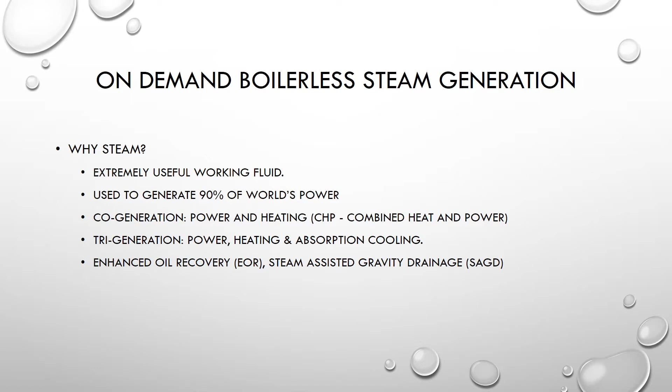Cavitation, the process of vaporization, bubble generation, and bubble implosion in a flowing liquid, is used as the underlying process within the cavitation engine. Modern diesel injectors are designed to enhance cavitation in the fuel being injected into combustion chambers. In the case of the cavitation engine, water is used instead of diesel fuel, and the injected water is filled with millions of cavitation bubbles.

This injected water volume collides with the impact chamber wall at a very high velocity, in excess of 1,000 meters a second. Instantaneous pressures occur which crush the cavitation bubbles within the water droplets. Cavitation bubbles have the ability to focus intense energy and forces during their collapse. The resulting heat energy contributes to the continuous creation of superheated steam within the impact and expansion chambers.

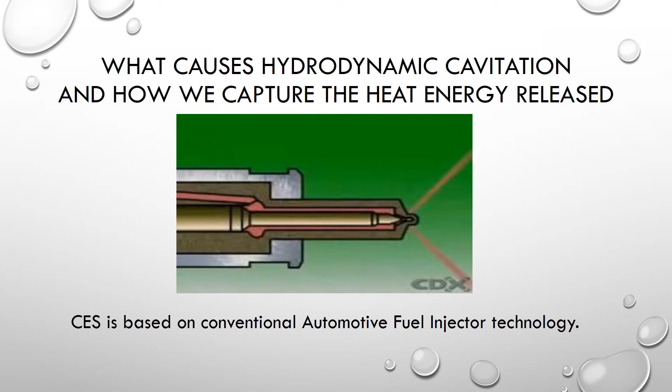As they expand, they disperse the fuel, and hence it burns better. In our case, we're impacting these cavitation bubbles on an impact chamber surface well before they expand beyond the point where they would normally be combusted. And this is essentially how the system works.

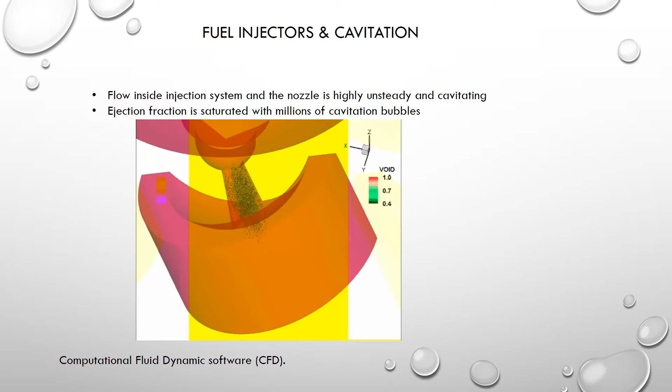In the classic Brennan text, the mathematics and derivation of this are gone into extensively, and if you're interested in this, you can go ahead and pursue that text. You can find that on the Cavitation Energy Systems website.

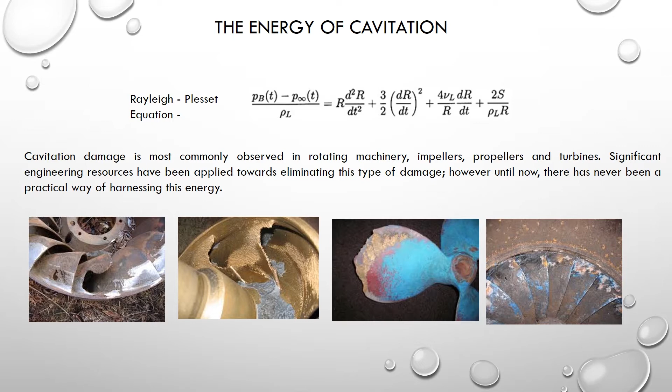Now, the thermal energy that's produced when these bubbles collapse is a function of the ratio of the radius of the uncollapsed bubble divided by the radius of the collapsed bubble, which in this case can be very small, raised to the cubic power. And this can be quite substantial.

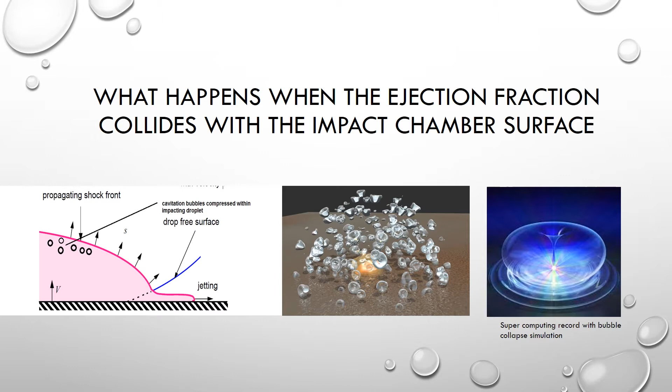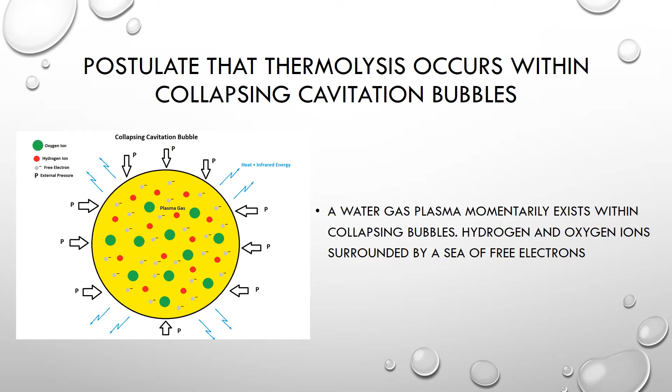Temperatures above 3,000 degrees Kelvin or centigrade cause in excess of 50% molecular separation of water within a short time frame. Above 5,000 degrees, you get greater than 90%. As the gas cools, molecular hydrogen and oxygen reform. Under pressure, this mixture explodes, yielding water vapor, steam, which is vented from the impact chamber at high velocity as it passes through the pressure relief valve. Conductive and radiative heat energy are also released and captured.

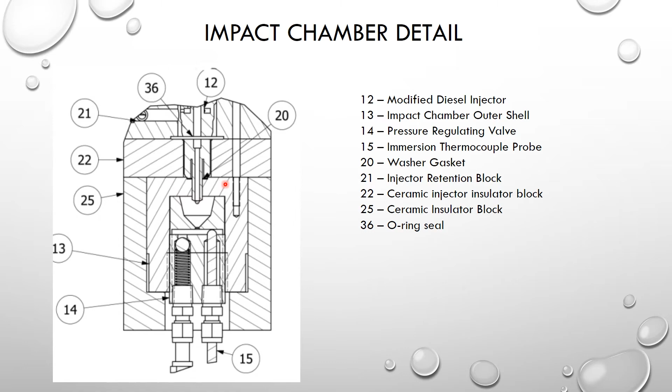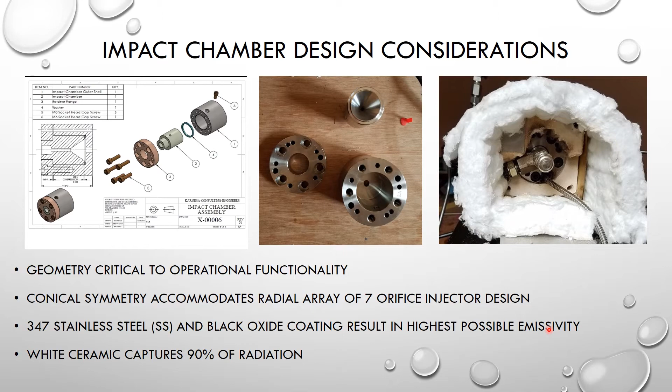What's important here is the system is using 347 stainless steel, which has a very high emissivity, as well as being coated with black oxide. These parts haven't been coated with black oxide yet, but the whole point is to retain as much of the radiative component of the heat transfer as possible. So we capture the conductive heat and the radiative heat, typically in terms of infrared, so that there's very little energy loss from the system.

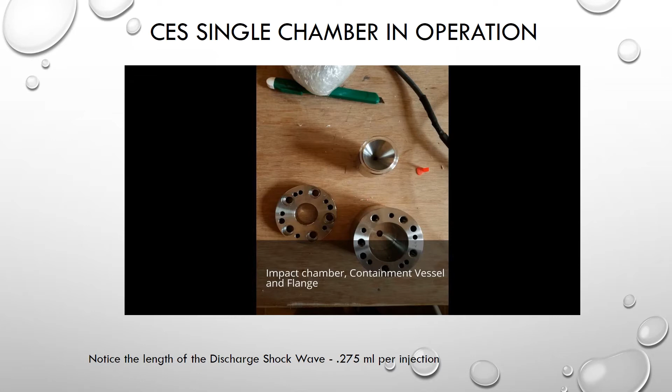What follows are the components of the impact chamber. The chamber itself is in the upper right-hand side of the image, along with the containment vessel below it. Next, we see the assembled impact chamber, followed by the impact chamber with the pressure regulating valve installed.

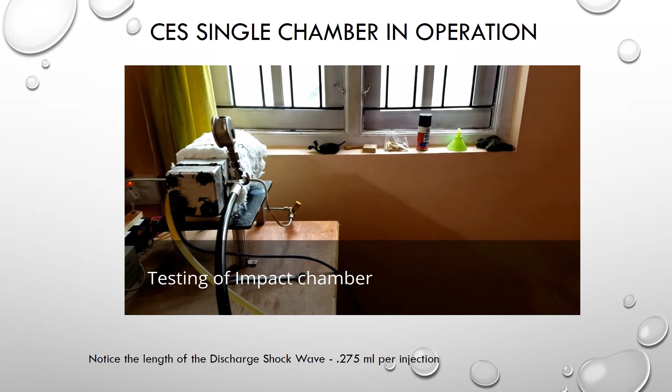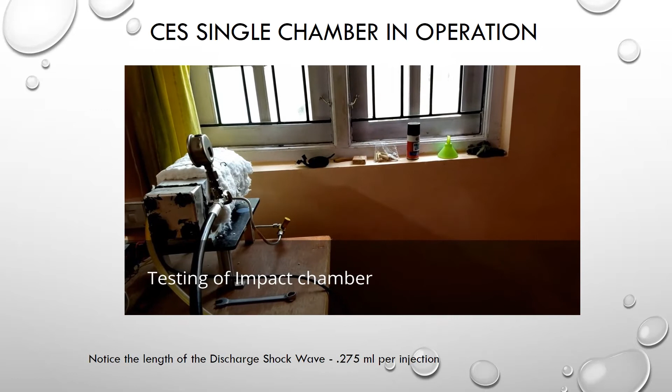The entire system surrounded by insulation is there, and now we see it actually operating at approximately 1 injection per second. Each of these injections corresponds to 0.275 milliliters of water. Notice the extent of the shock wave and the power of this, and how far it is from the impact chamber itself.

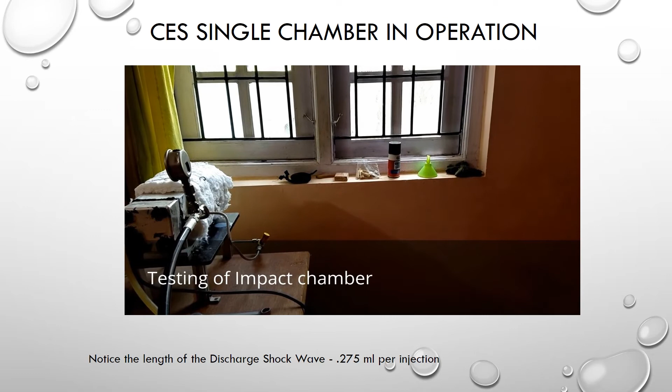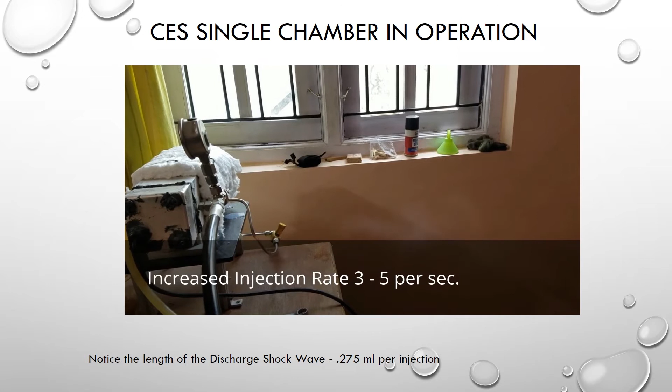We are increasing the pulse rate to 3 to 5 per second. In a practical system, this is where we would normally operate. This is one element. Typically, in a 500 pound per hour steam system, you'd have 32 of these units ganged together under central control by a computer.

Here you see it in slow motion. It's like a gun going off, you know. Mm-hmm. Reminds you of the shrimp.

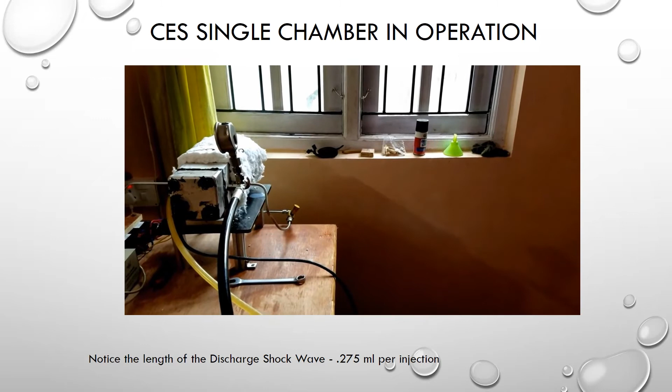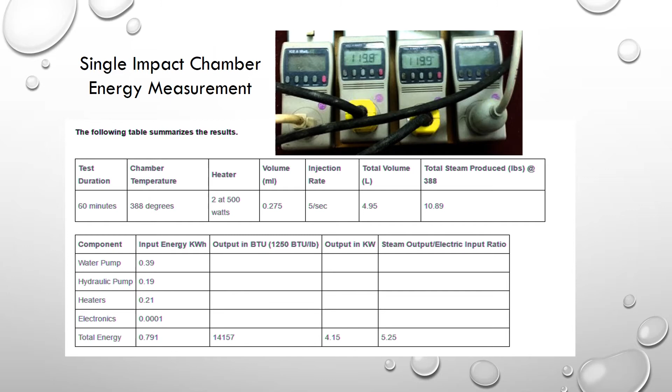During our developmental work on the impact chamber, we thought it would be interesting to test injecting a solution of salt, a 4% solution of salt. This is not coincidental, because the salinity of seawater is approximately 4%. When we did this, we were shocked with the results, and you'll see that in the video that's coming up. We obtained these very dramatic explosions.

So reflecting on this, we tried to conceive or postulate a mechanism for what exactly was happening. Within these collapsing cavitation bubbles, we have a gaseous plasma surrounded by a sea of electrons. Now imagine that collapsing bubble with these large sodium ions around the periphery. A sodium ion typically has a redox potential of 1, meaning it needs 1 extra electron to become a stable metal. So in our hypothesis, the sodium ion picks up an electron and becomes sodium metal.

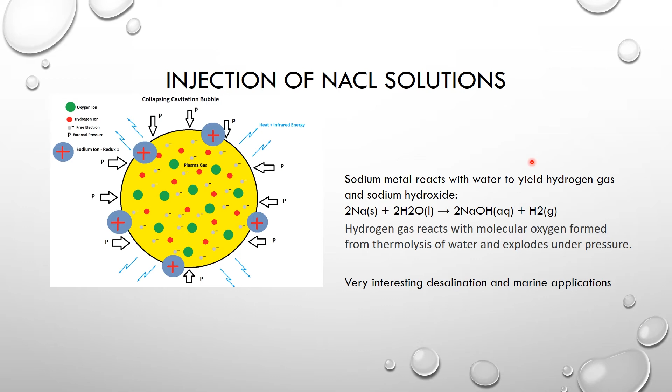The following video of the saltwater injections is recorded at 1/8 speed slow motion. The explosions were so powerful that they damaged the pressure relief valve, set to at least 600 psi, after 6 explosions.

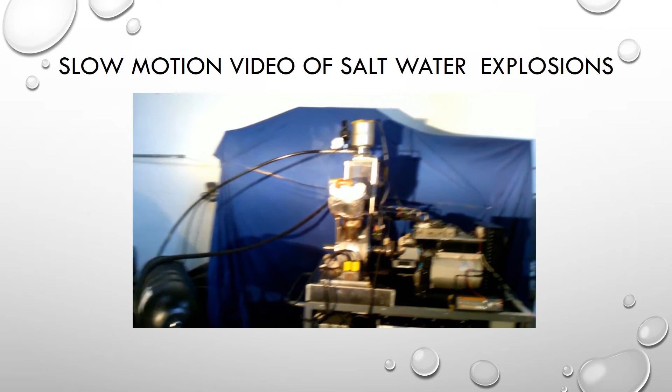This is a 4-impact chamber segment of what ultimately will be used as a 32-impact chamber, 500 pound per hour unit. What you're seeing here are piezo injectors. We'll be using hydraulic injectors for this.

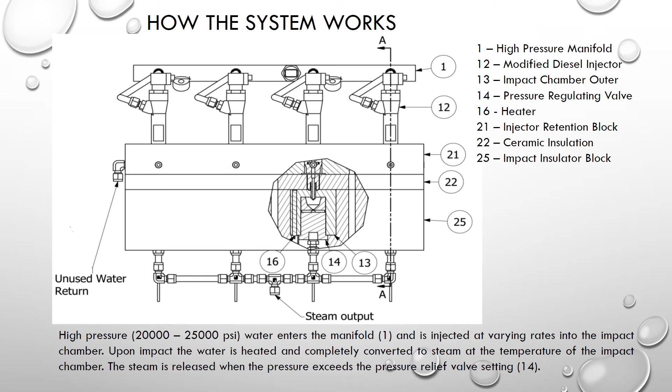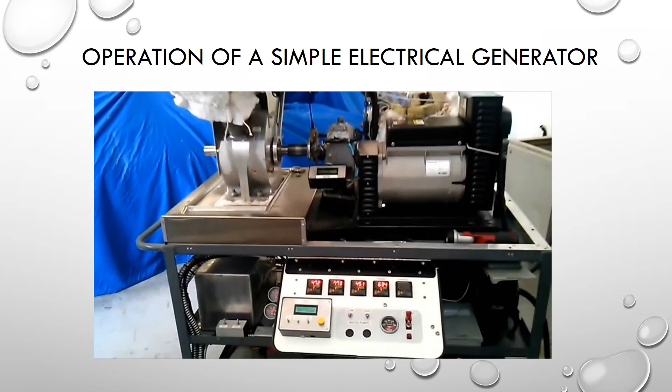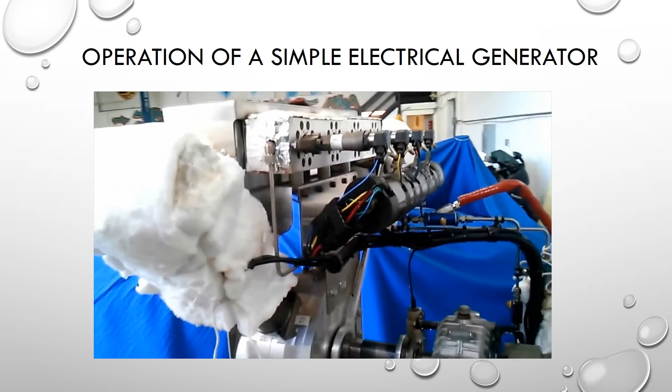What follows is an example of a 4-impact chamber unit driving a 20 horsepower V2 reciprocating steam engine, which in turn operates through a power takeoff and a 12 kW generator. This is an example of the small scale power generation that the CES is capable of doing.

During the following section, we're going to cover some of the more significant applications that CES is capable of. This would include enhanced oil recovery, power generation, textile manufacturing, desalination and water treatment, and marine propulsion.

Enhanced oil recovery is perhaps one of the most important areas of application for CES. The term enhanced oil recovery, EOR, refers to the technology used to extract crude oil that cannot be extracted through conventional technologies from oil reservoirs. It is also termed a tertiary recovery process, as it takes place after the primary and secondary oil recoveries.

Oil extracted via primary recovery accounts for 5 to 15% of the total reservoir, while secondary recovery can extract 20 to 60% of the total oil present. By installing enhanced oil recovery, 35 to 75% of oil can easily be extracted from an oil reservoir. To extract the proved reserves, oil extraction companies are pushing the use of enhanced oil recovery in existing oil wells.

Thermal enhanced oil recovery technology consumes hot water and steam to stimulate the extraction of crude oil from the reservoir. The commonly used steam injection enhanced oil recovery methods are cyclic steam stimulation (CSS), steam assisted gravity drainage (SAGD), and steam flooding.

Steam dominates the thermal technology market and is significant in North America, as most of the imported crude from Canada, 35% of all U.S. imported crude, is extracted using SAGD. Per barrel energy costs in producing this oil are heavily dependent on the cost of manufacturing steam.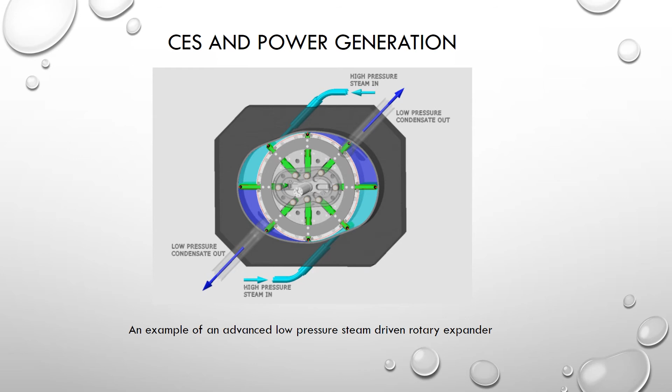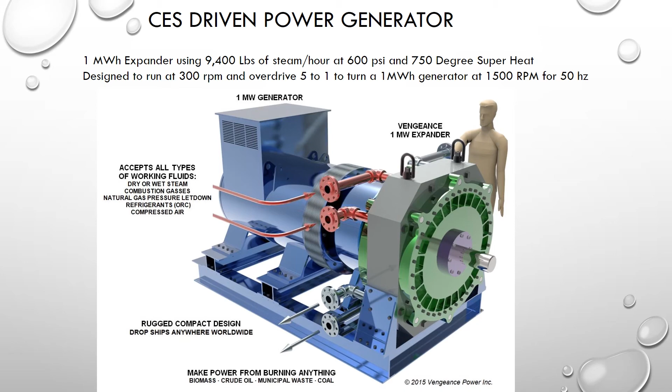This slide depicts a linear generator. Linear generators have become very popular of late because they're very efficient, upwards of 90%. We will design such a linear generator using our impact chambers arrayed on either end to operate it under computer control.

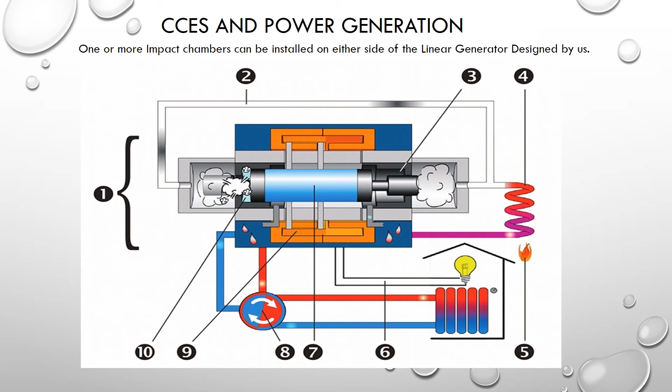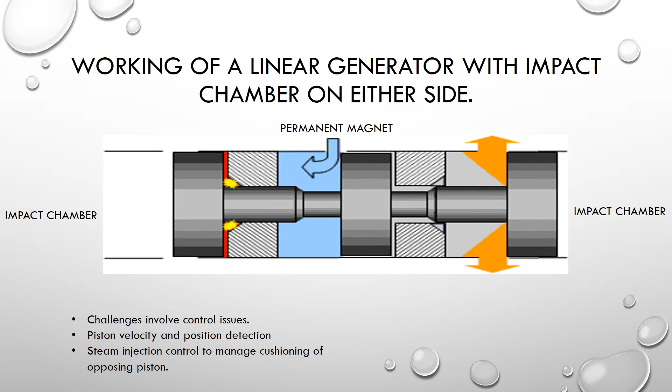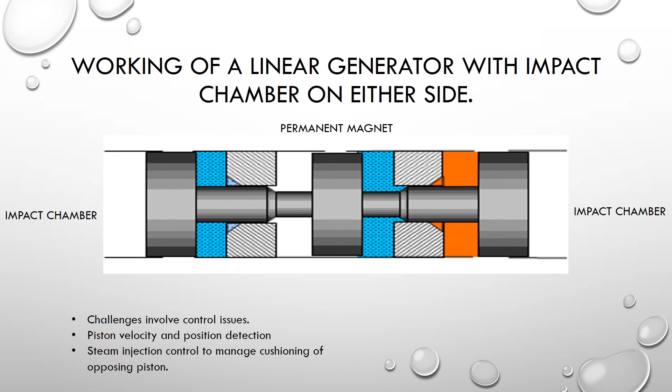Linear generators are a very exciting technology, and we anticipate building a working linear generator with our CES system. The problem with linear generators is, of course, being able to detect the position of the piston so you know when to input a cushioning injection to keep the piston from crashing into the opposite side. This has always been the problem with these: cushioning and position control. But we expect at some point in time we can overcome this and have a working, operational, economic linear generator.

Textile manufacturing is a major consumer of steam. It's used in all aspects of the process: spinning, weaving, drying, heating, and maintaining the temperature of textiles. In our experience, much of the major textile manufacturing occurs outside the United States and Europe, and is done in countries where labor is less expensive, in particular India and China.

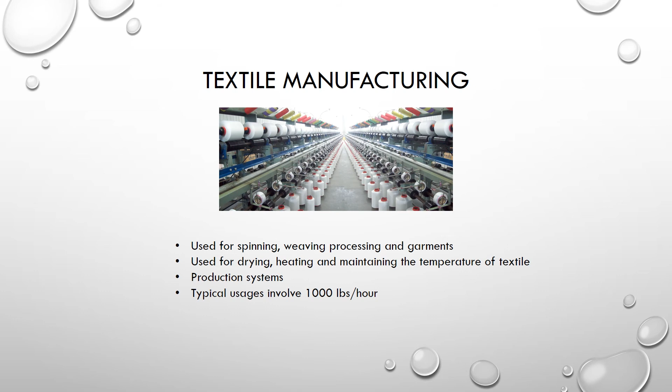In our experience, the largest textile manufacturing plant in India, located outside of Coimbatore, LS Mills, was very interested in this technology. It needed about 1,000 pounds per hour for their process. This is an interesting application because in these large countries, particularly in Asia, there's a very considerable amount of textile manufacturing.

Desalination is a significant market sector, expected to reach upwards of $13 billion through 2016. It's estimated that 40% of the world's population lives within 100 kilometers of the coast, and many of these communities are in arid regions where fresh potable water is in short supply. Only 3% of the world's water is fresh water, and two-thirds of that is in isolated areas like glaciers or the Arctic, otherwise unavailable for human use.

This is especially true in coastal regions of the Indian Ocean, Persian Gulf, and Southern Pacific, where not only fresh water is in short supply, but electricity and food resources as well. We envision CES steam technology to be an important component in producing fresh water through desalination, more than likely in a trigeneration process where we're producing fresh water, producing electricity, and using the heat for absorption cooling.

Produced water is typically a byproduct from some form of oil recovery process, either steam-assisted gravity drainage or, more commonly, fracking. Oftentimes this water is highly contaminated with toxic compounds and needs to be detoxified. One way to do this is through steam distillation or flash distillation. It's a significant market as the use of enhanced oil recovery grows over the next few years.

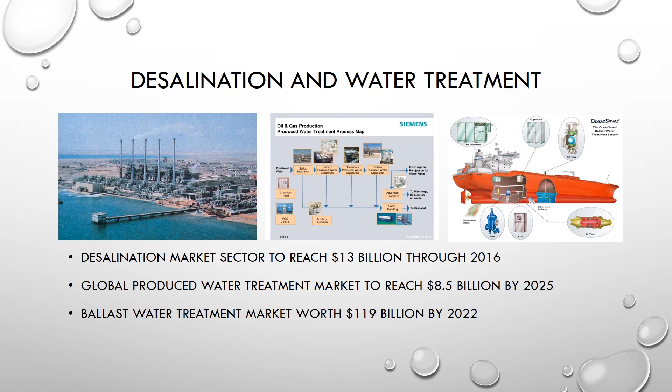Ask anybody about zebra mussels in the Great Lakes and it gives you a pretty good idea of why you don't want to leave ballast water untreated, where this water has come from other countries, and then ships arrive in the United States and dump this water into a U.S. port. With this growth in the global transportation market, this is going to be a very significant component, and steam treatment methodologies, i.e. CES, will be very important in the coming years.

The intriguing discovery that salt solutions similar to seawater can be made to explode following injection into the CES apparatus has potentially profound implications for the marine transportation industry.

Besides being essentially an inexhaustible source of fuel, i.e. seawater, the other issue is emissions from ships. These remain one of the least regulated parts of our global transportation system. Bunker fuel, good old number 6, is the cheapest and most polluting fuel available and is used by most of the world's 90,000 ships. For example, in one year a single large container ship, such as one of the Maersk fleet, can emit cancer and asthma-causing pollutants equivalent to that of 50 million cars. Bunker fuel contains up to 2,000 times the amount of sulfur compared to diesel fuel used in automobiles.

Many ports, such as the Port of Long Beach, require ships to convert over to a less polluting diesel fuel before they're allowed to enter U.S. ports. In short, CES technology will eventually redefine marine propulsion system engineering using seawater as a fuel source, and we find that to be very exciting.

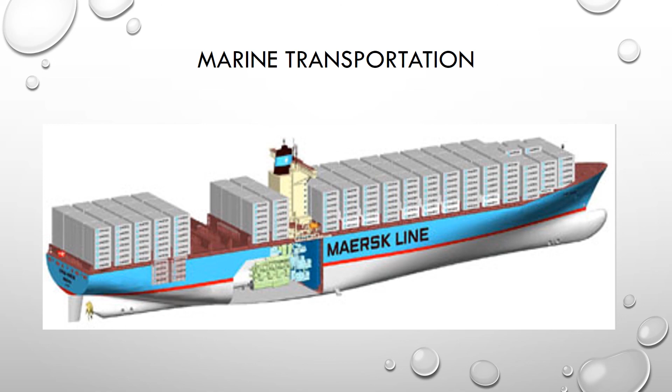CES technology is unique. No commercial inventions exist that functionally harness cavitation. CES is the only system capable of instantaneously producing steam on demand with significantly less energy than conventional heating, and at significantly less cost than conventional boiler-based methods. CES has comprehensive, strong patent protection covering all aspects of the technology, and our most recent patent, which we expect to be issued soon, has many claims, none of which have been challenged thus far.

Cavitation is the only way to generate these temperatures, 4,000 to 8,000 degrees Celsius, short of LENR, low-energy nuclear reactions. CES is the only steam-based system which creates a usable source of energy through a mechanical process rather than internal or external combustion. CES uses recently available modern technologies which are financially viable: hydraulic injectors, computer controllers, ultra-high pressure pumps, carbon fiber, and ceramics. CES impacts almost every aspect of modern living: power generation, transportation, desalination, heating, refrigeration, shipping, and so on.